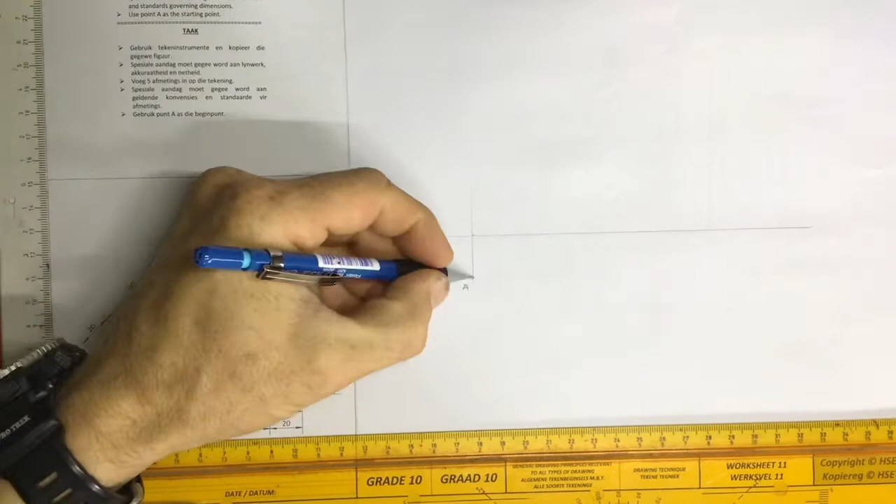Object over here, I have got a position A over there. If they've given you position A, you have to start your drawing there. What I'd like you to do is to first look at where your center lines are in relation to A. They've given you a measurement over here of 25, so you measure up the 12 plus 6, that gives you that line over there, and measure your 25.

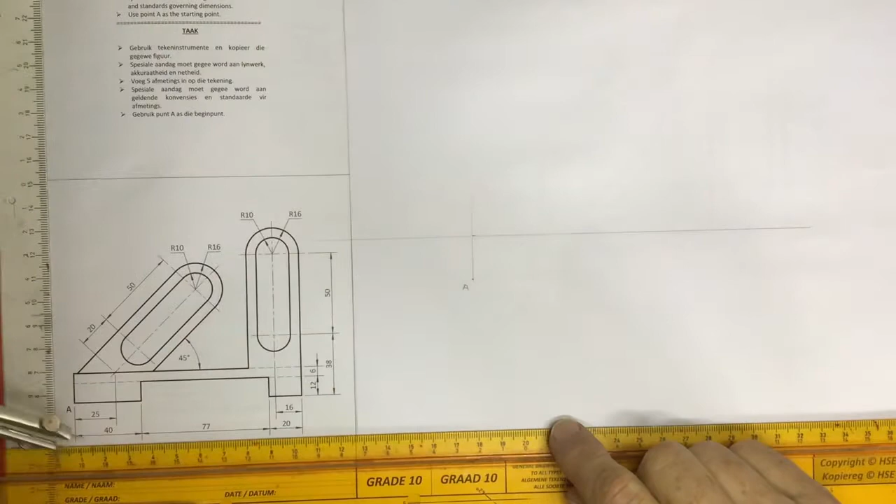Note the use of dividers for measuring. It's much quicker than a ruler. Make a little mark. Just make a little intersection at that mark that you just made. And you can then set your 45-degree set square. You'll see that they've got a 45-degree over there. Place that over there, and you draw in a center line.

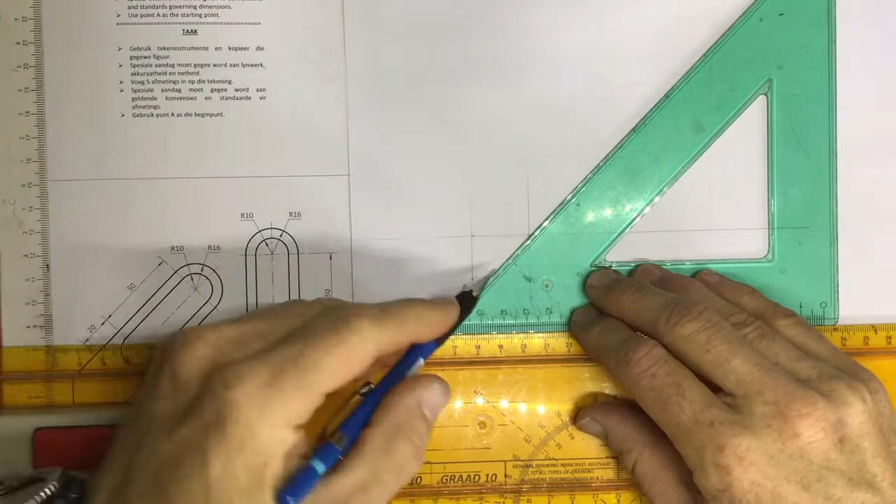Don't stress too much about how long the center line is. You can make it basically any length. Right, that should be done with a 0.3 pencil. Please remember to change pencils when you're doing center lines. They tell you that you've got 20 millimeters going up there, so you measure off 20 millimeters, come in at that point, mark that off.

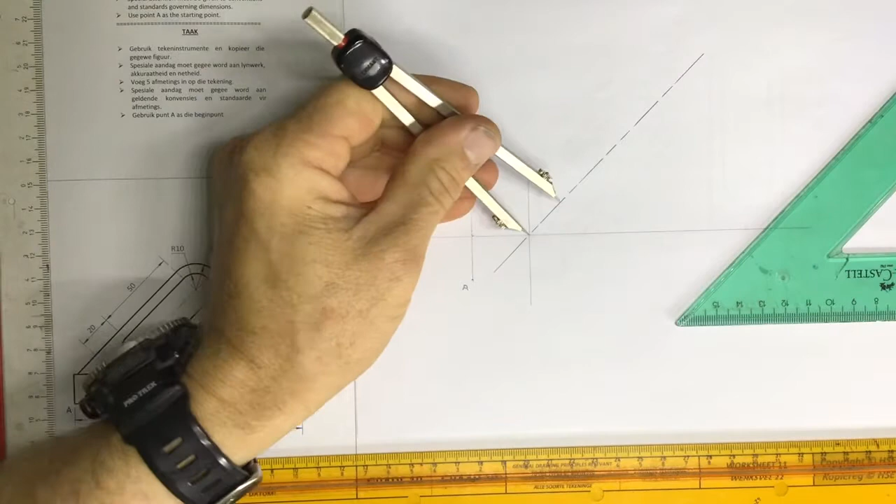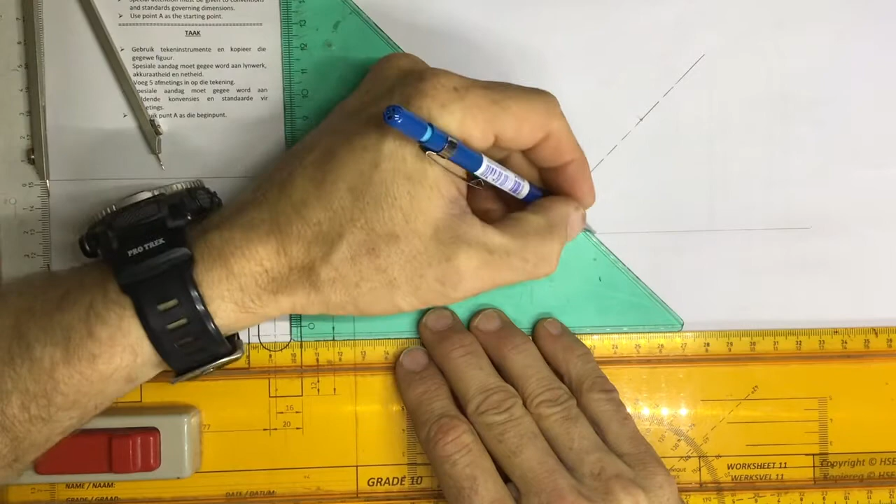It says that you've got another 50 millimeters going up there, 50 millimeters, that's that 50 over there. Mark that off, bring your 45-degree set square in, and draw in your center lines over there. Long dash, short dash, long dash. Go over there. Short dash in the middle, long dash. Right there, my two centers over there.

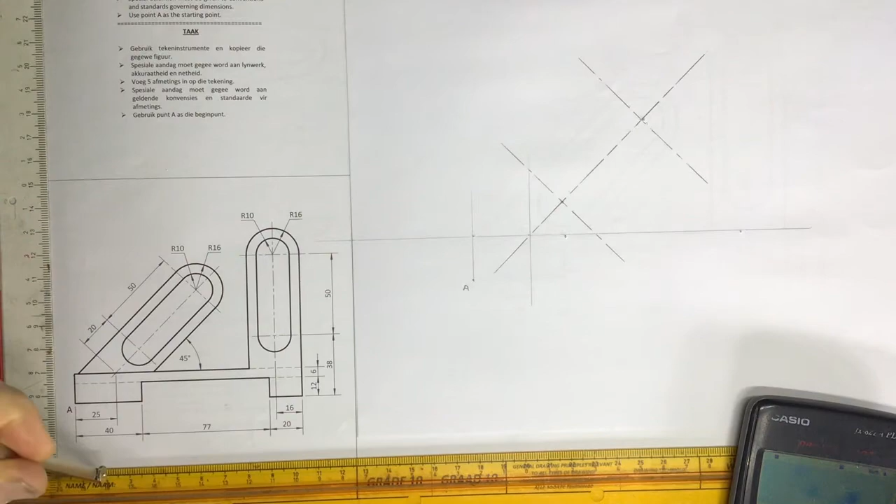It then tells me that I need to go all the way across over here. That's 40 plus 77 plus 20. Well, you can mark that off. Go 40 millimeters from the edge over there. Mark that. 77 millimeters going from there to there. And 20. Note this use of the dividers. Very quick and easy to make your measurements.

Just draw in some construction lines going up over here. These construction lines. There we go. Okay, once you've got those in place, it says that you've got a radius of 16 over there. Take your pair of compasses, or pair of dividers, actually it doesn't really matter, and you measure off 16 millimeters going back from that last line over there. 16 millimeters there, and I've got another center line that's going to go up there.

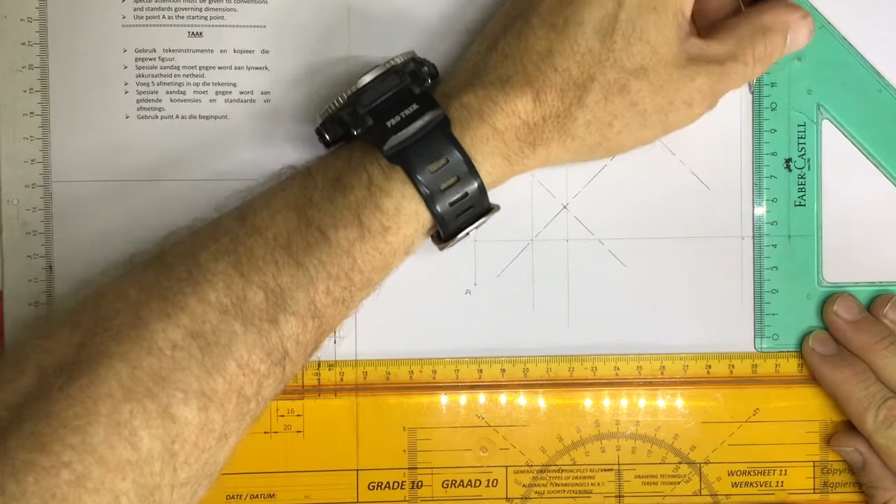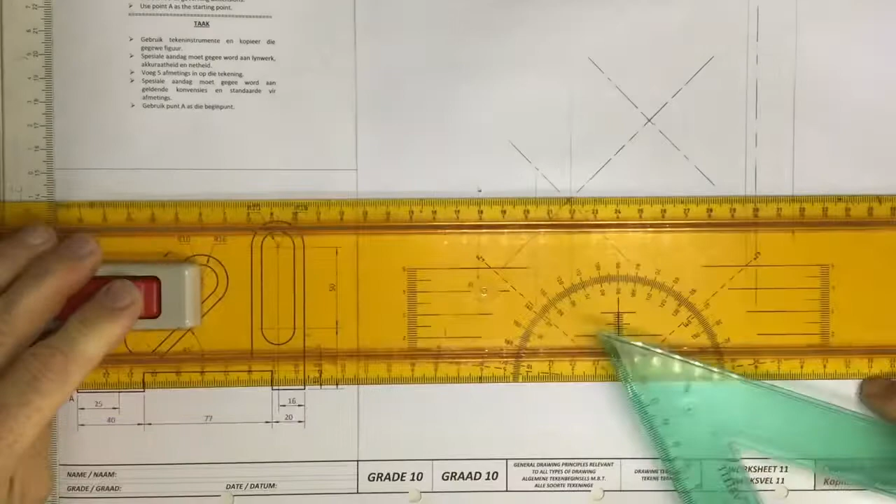Long dash, short dash, long dash. The nice thing with your center lines is that you get marks for them, and once you've got them in place, it's very, very easy to work out where you are. 38 millimeters going up there, so I come over here to point A, just mark that off. Going to take that across. I need a center line over here, short dash over there, long dash out there, long dash out there.

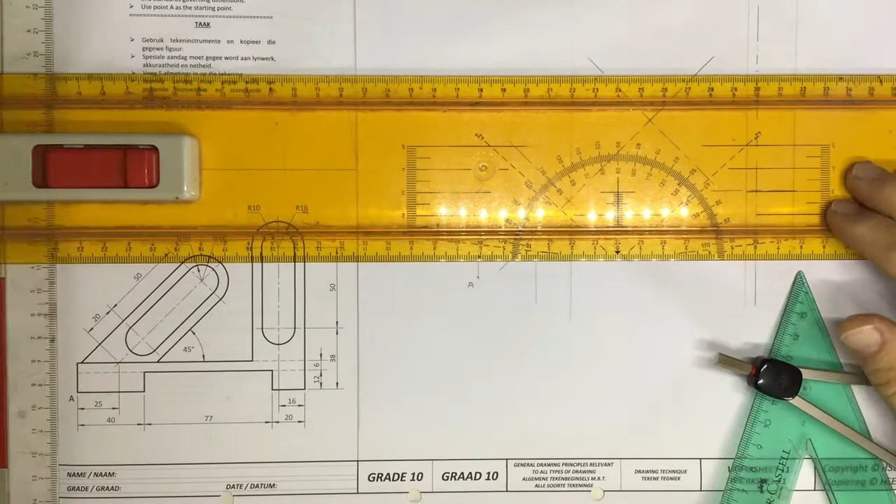It says that I go another 50 millimeters going up there. Take your pair of dividers, measure off 50, go in there, measure off 50 over there, go up to the top there, short dash over there, long dash, right, we've got our centers in place. Now what I can do is I can start drawing in the little curves that I need.

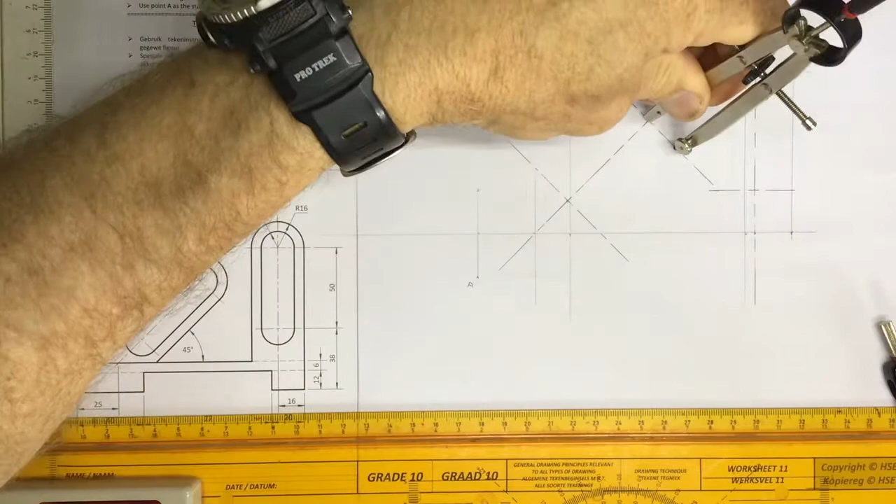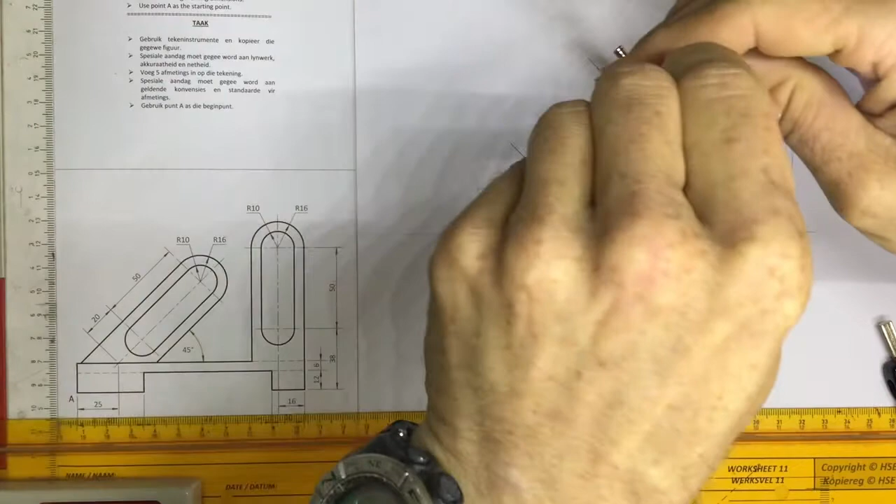It says that I've got a radius of 16, set your pair of compasses to 16, go in over here, and make that lovely little arc over there, 16 millimeters in radius. It says that I've got a 10 millimeter radius as well. Set your pair of compasses to 10, go in there, mark off a 10 millimeter radius going around over here. Okay, once that's in place, I can then go over here.

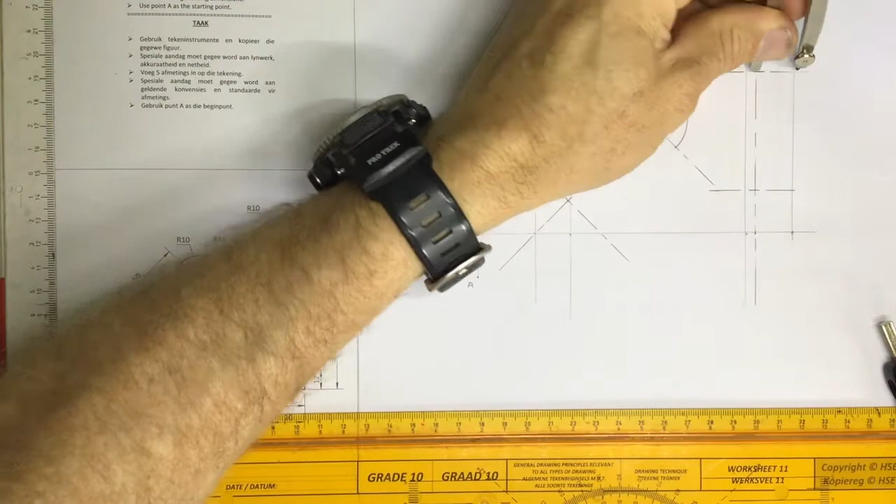It says that I've got the 16 again. I could have saved myself some time in measuring if I had noticed that at the beginning. And I can then draw in, let me just check that measurement. I don't think that I got that quite right. There we go, there's 16, okay, that does make sense. There it is, 16 millimeters going around like that.

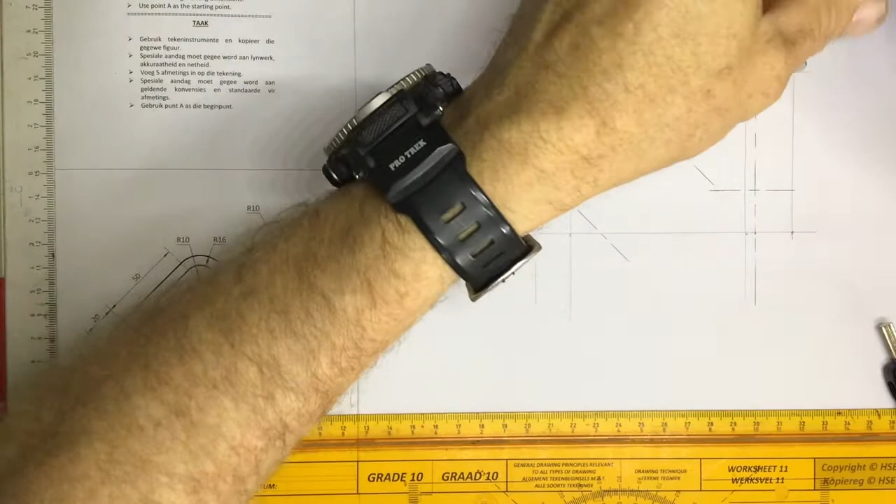Okay, and a 10 millimeter radius as well, is that right? Still 10. Take that to 10, take that in there, and measure that around over there. There's my 10 millimeter radius going around there.

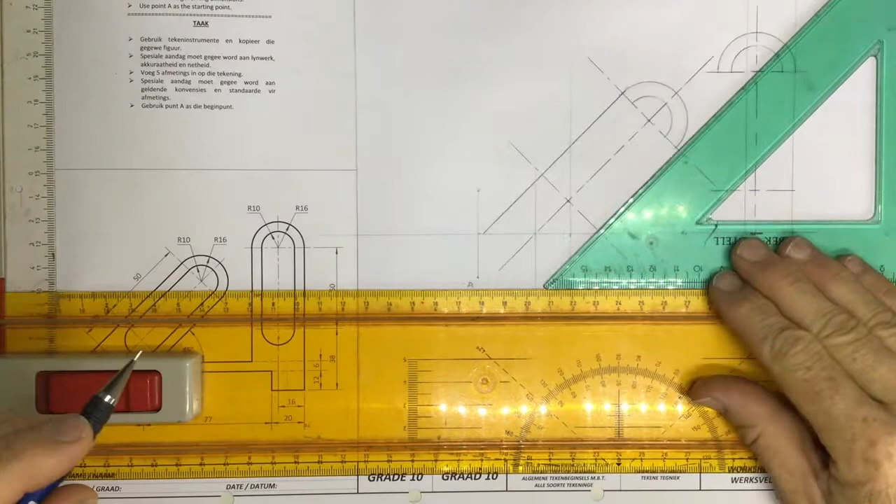Once that's in place, I can now start drawing a line at 45 degrees coming down over there, linking up with that arc over there, a line going from there to there, a line coming down to A over here. I can draw a construction line from A going across there. I've got a line coming from that arc over there all the way down to the bottom over here.

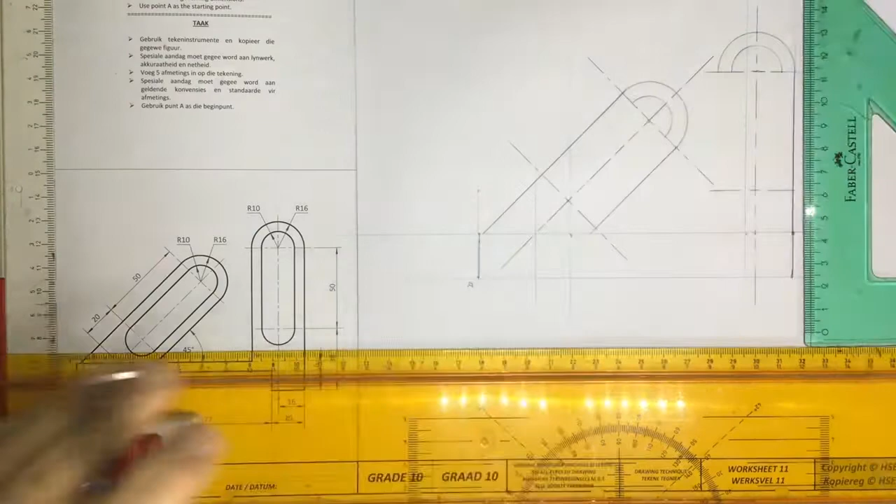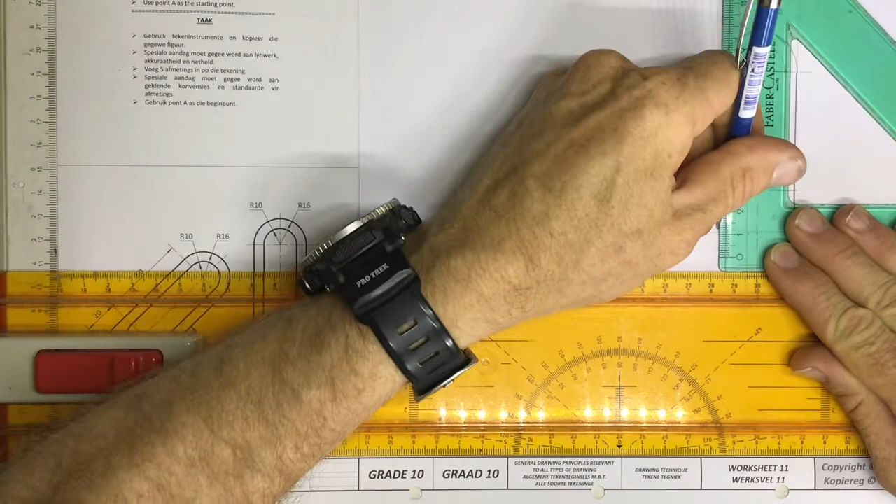It says that I need to go 20 millimeters back. I've got that little line that I drew in earlier, 20 millimeters back there. It goes 40 out to there, so I can draw in a line going out to my construction line that I drew earlier. I've got a line that is coming straight down over there from the curve all the way down to that point over there. I can draw in a line that goes straight the way across from there all the way to there.

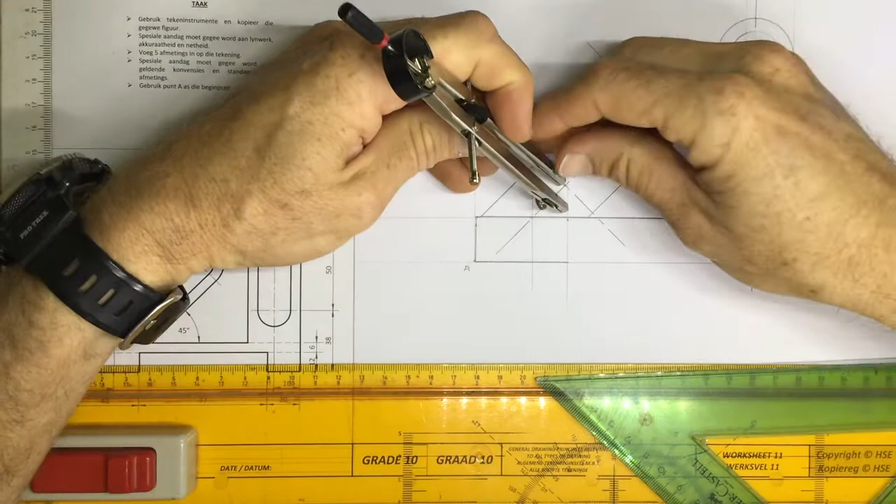I've got another little 10 millimeter radius which needs to be drawn down at the bottom over here. So my pair of compasses is still set to 10. Go in there, draw in the arc. Note I'm always drawing in the arcs first. Once the arcs are in place, I can then link them up very, very easily with a line. Always draw the arcs first before you draw the lines. You'll find life is so much easier.

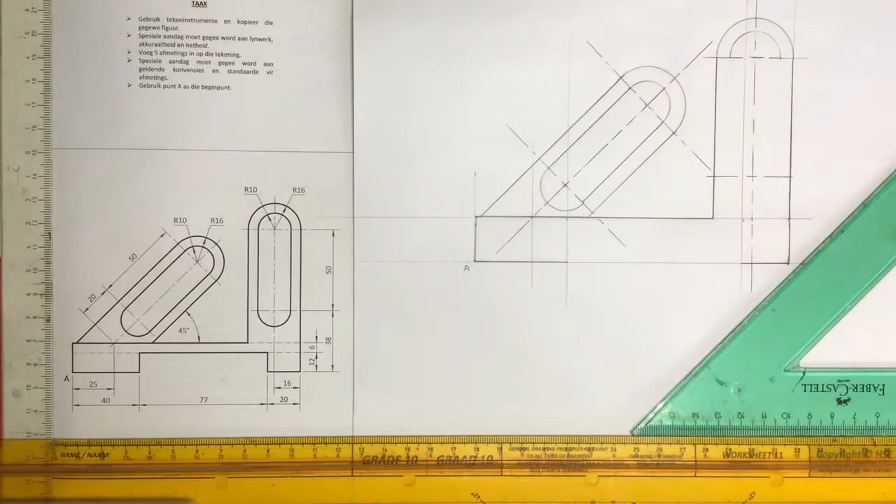Right, that's that. I've got another little arc of 10 millimeters on this end of things. There we go. Arc coming around over here. And I can draw in a line connecting that arc and that arc, and that arc and that arc.

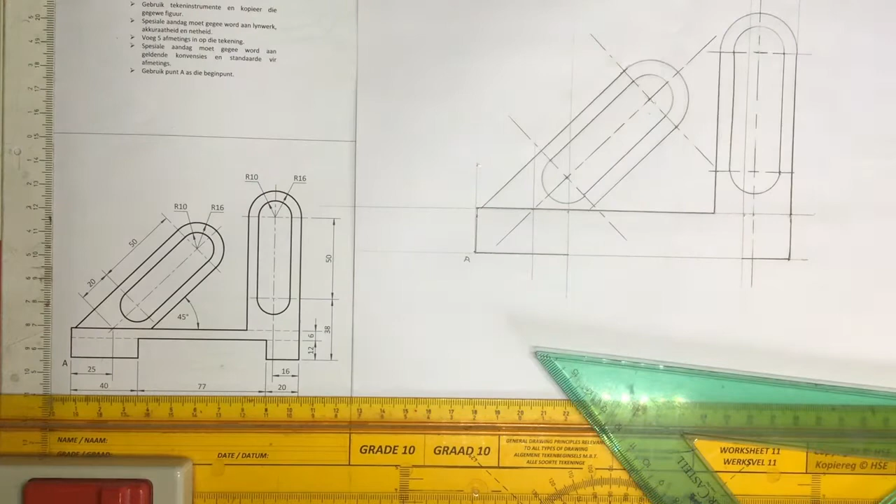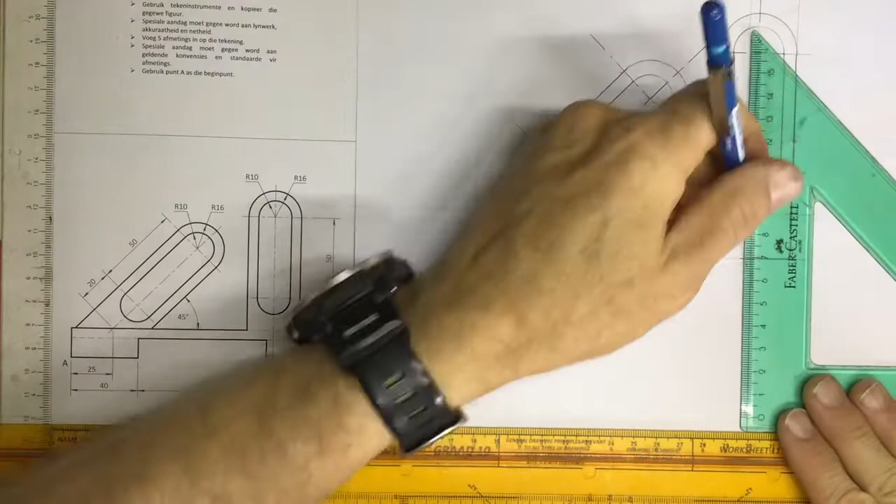Right, once that's done, I need to go up the 12 millimeters over there. Let me just measure that off quickly. 12 millimeters going up over here. And I can now draw in a construction line going across here. And I can draw in that little line over there. This thing goes across to 20. There we go, that's at 20. I can draw in a line going across here.

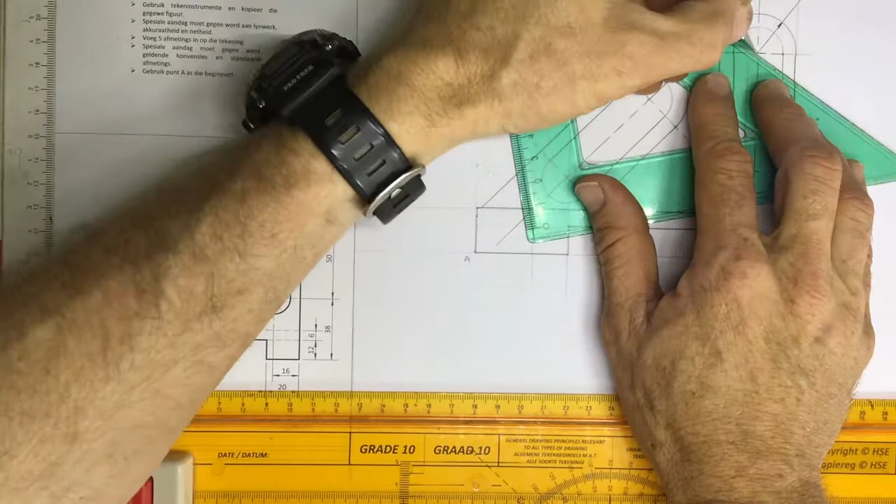Okay, and once I've done that, I can then start doing all the dimensions. Just draw a line going out over there. Draw a little arrowhead on that line. Draw a line going out to there. Draw an arrowhead on that line. You can draw in a dimension over here. Dimension line going across there. Arrowheads on there.

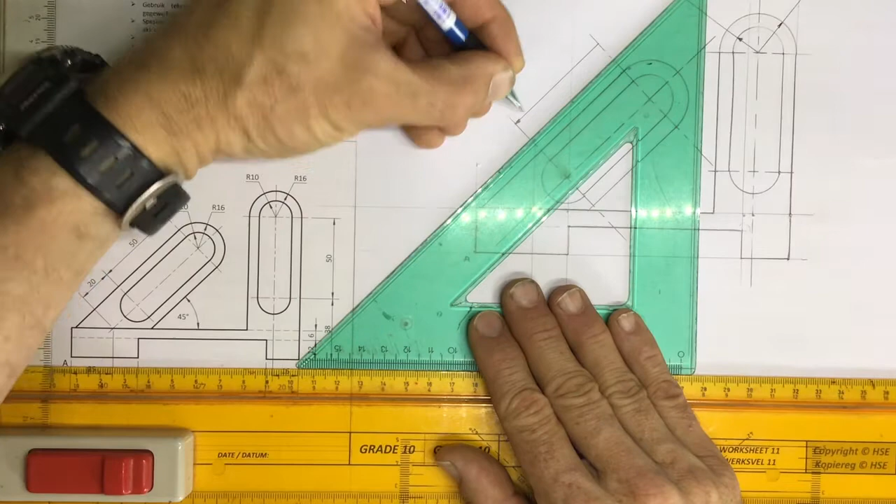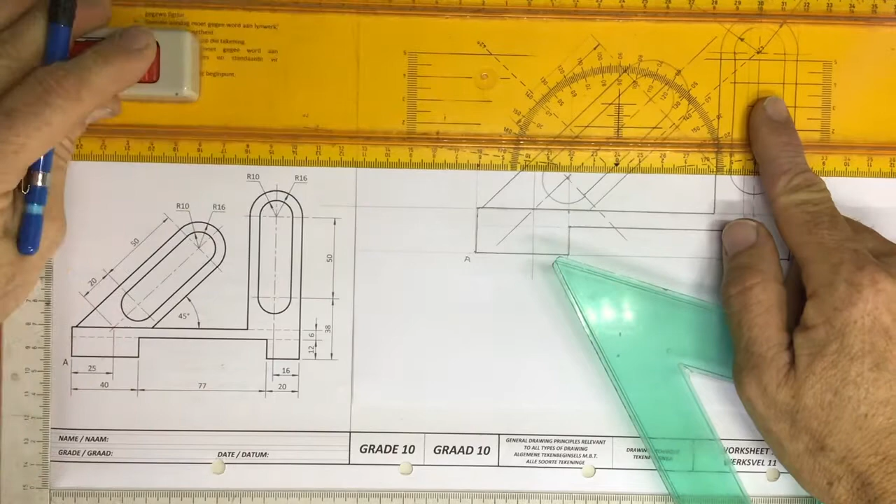Arrowheads on there. Remember to draw some construction lines 1 millimeter away. Construction line, another construction line over here. I'm going to draw in a little line over there, a little line over there. Draw construction lines on top of that. Draw a construction line just above that. Go over there, construction line, another little construction line over there. And you can then write in radius of 10 and a radius of 16.

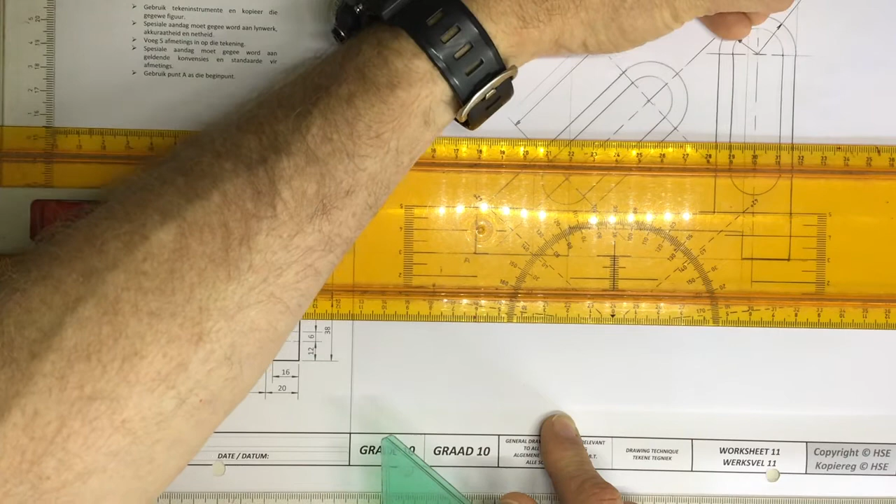Note the gap between the leader line over there and that 16, the little gap as well. Don't write it directly above there. This over here is 50. Write that in. Make sure that you have a gap between your writing and your dimension line, and make sure it's in the middle of that dimension line.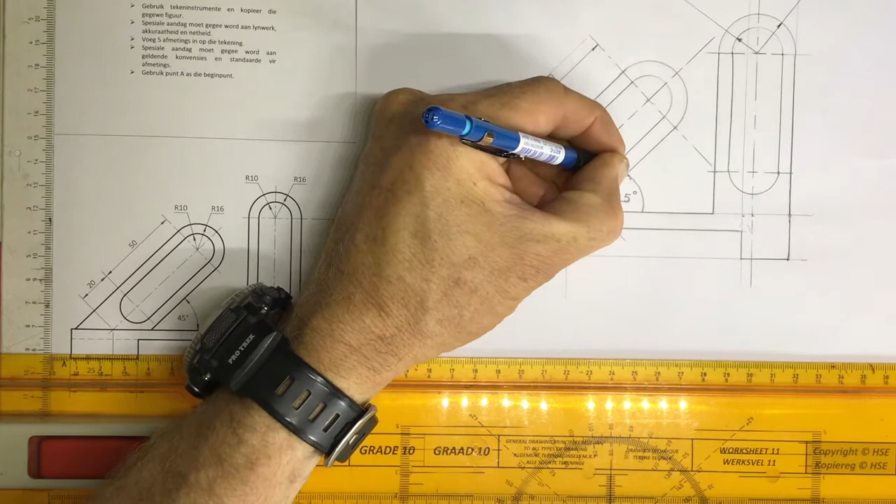Doing this 45 degrees, write in your 45. Remember, it's a closed 45 degrees. Okay, you should have drawn the little construction lines before writing. I haven't done that for some odd reason. And you draw a nice smooth curve freehand over there and little arrows over there and over there. Make sure you've done those dimensions. I want to see them. So it's that dimension, that dimension, that dimension, and that dimension.

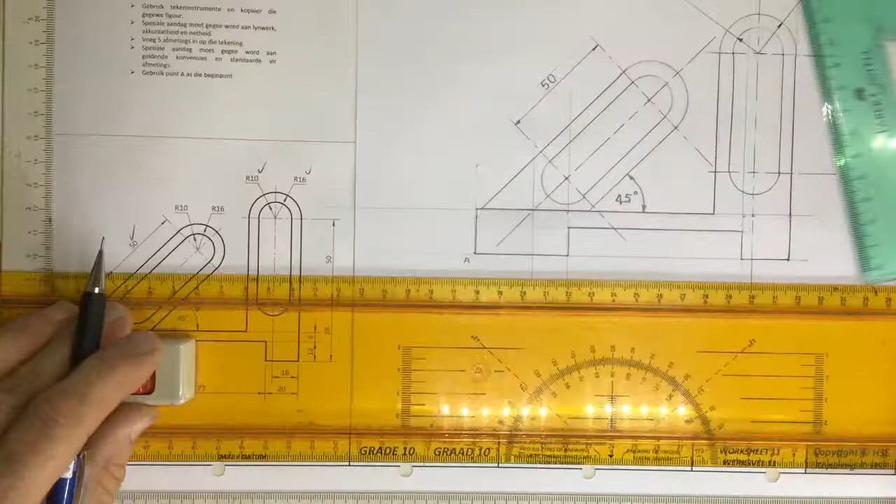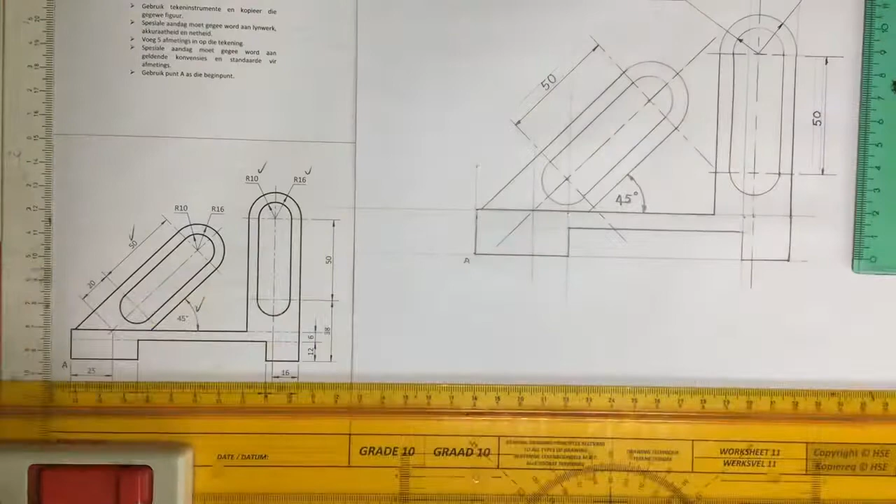You could write in another dimension over here. I think 50 over here would be a good dimension to put in. Place your little extension lines over there, 10 millimeters away, dimension line coming down there. Put the arrows on, write in your 50. Remember leaving that little gap, and write your 50 in over there. There we go. So get those dimensions in. I'll be quite happy with that.